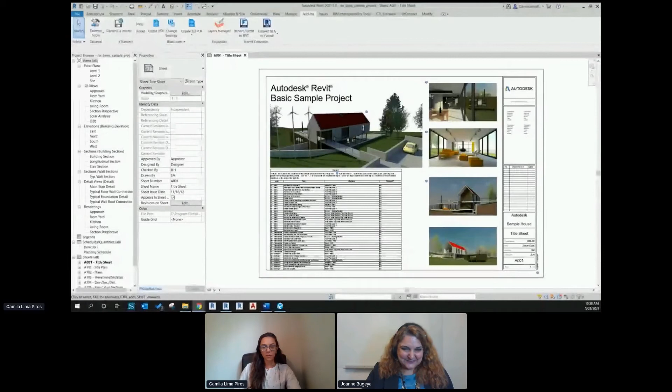So to start today's presentation, I want to touch base with one integration that not a lot of people know about, which is Bluebeam in Revit. That integration is automatically installed when you install Bluebeam. It installs this add-in in Revit, and with that add-in, you can create PDF files, adjust settings, and create 3D PDFs as well.

One of the settings I want to point out, I'm just going to click here under settings. There are a few things here that we can do. We can create the PDF straight from this, and Bluebeam recognizes the sheet size automatically.

The other thing is exporting rooms to area measurement. So if you're going to create a set of drawings that you'll start using area measurements later in Bluebeam, this tool allows you to export the area as an area measurement, which you can then modify later in Bluebeam. It's an interesting feature not a lot of people know about, and it can save time since we're talking about time management here, because otherwise we end up creating those areas in every single set of drawings. Then what else is in here?

There's some security settings, so you can establish that at an early stage instead of assigning it in Bluebeam. There's stuff like requiring a password, and if I check this on, you also have some other permissions you can use.

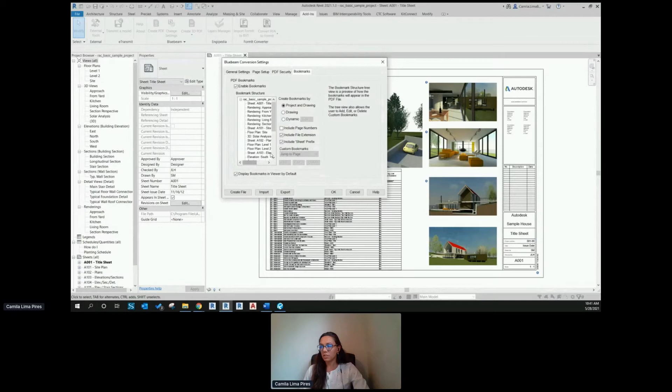The other setting we have here is the label. Right under the general settings, we have the option to use the sheet name as the page label. I've caught myself a couple times doing this, where I have to go set up the page label based on the sheet name and sheet number, just because it's easier for me to navigate through the pages in Bluebeam. So I found this handy as well.

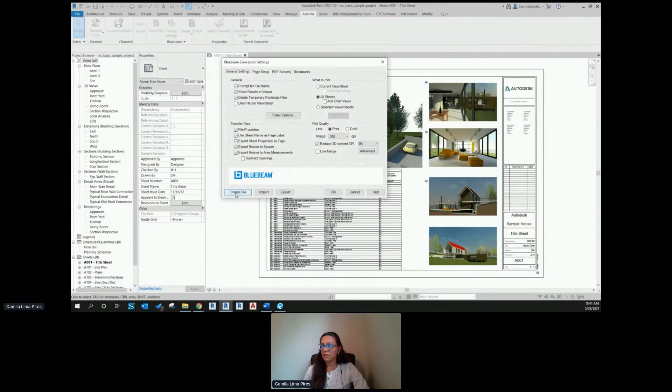Once you're done with all the settings, we can create the file. If I click here, create file - or I could have added the password, so let me go back and check this. I can create the file, and Bluebeam starts creating the PDF file. It's going to request a folder location, so I'm just going to save here.

If you want to take a look at the advanced settings of how the image is compressed and some of the resolutions, you also have access to that information here. I'm just going to click save - this will save on my desktop, process that, and open Bluebeam automatically.

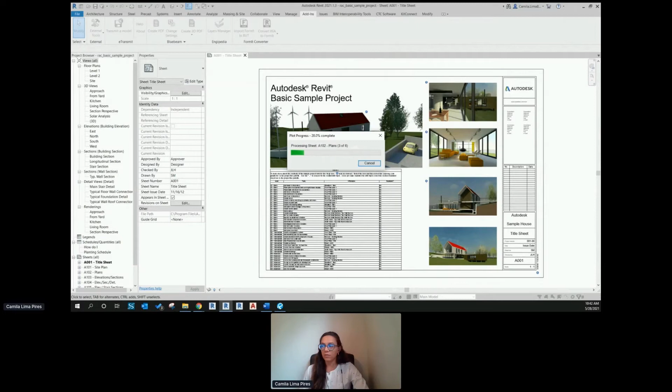The goal of doing this is, one, because I want to use the area measurements for the future. So while Bluebeam is loading, I have this set of drawings here, which is basically what we're going to start discussing - how we're going to create the area measurements, but also make that easier and use the data that we need, and link to other files as well.

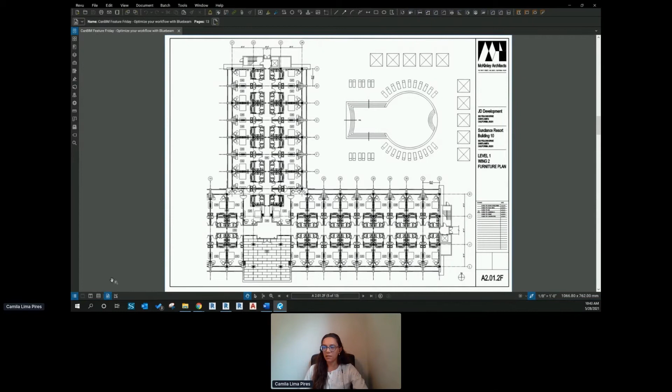So in this set of drawings, one of the things I want to point out is the markup list, which is located here at the bottom of the screen. You can also expand it through here.

With the markup list, this is a place that automatically tracks all the markups placed on a PDF. That includes the author, the date it was placed, any comments associated, and if there's any status, it will track all that information.

So if I place any markup here in this drawing, I'm just going to place one here. It's very simple, it starts tracking that information.

One thing we can do is modify the subject of this markup, because we can use the subject and the label to filter out information.

This is going to be formatted as a table, and each row represents a markup that has been added to the active PDF. Each column shows a particular piece of information about that markup.

In here we can also hide some of this information. So under columns here, we have this list of markups. So if I uncheck author, it will hide from the column here.

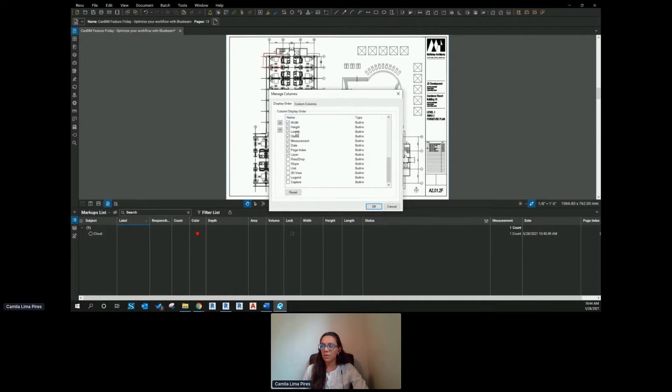If I go to manage columns, I also have other columns here that might not even be showing on that list, so just be aware. Maybe you have a custom column you created, or want to use certain data that's not showing on that list. It might be because it's not in that display order, and you can change the order from here as well. Or there's a simple way, you can just drag and drop to move those columns and expand their sizes.

So I'm just going to hide this responsibility column, just because I want to keep this clean with the information we actually need for the presentation today.

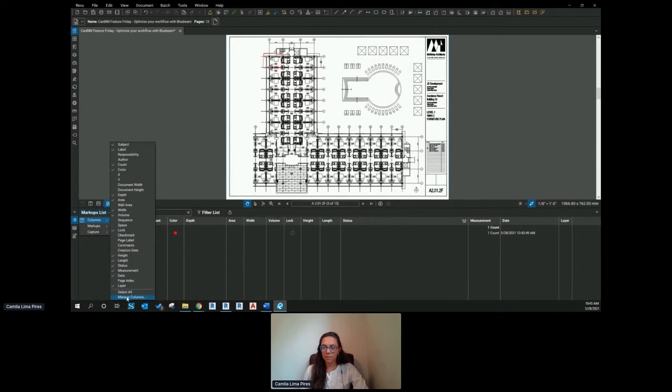Awesome, I briefly mentioned custom columns. So under the markup list, columns, and manage columns, we can create custom columns. There are different types of columns you can create - choice, text, formulas, you can add numbers. Within the choice, you can add a value for each component.

It's something we're going to do today. With that value, you can actually use it for your estimation.

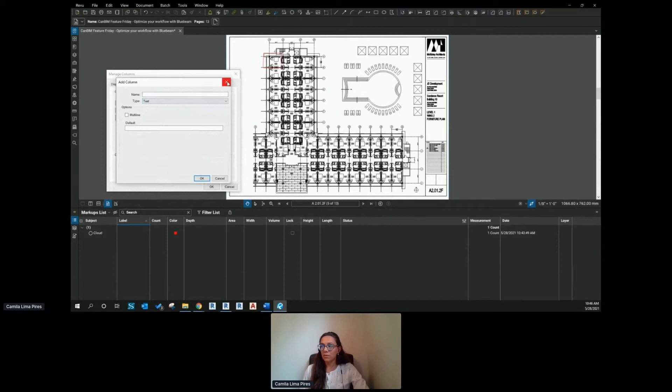So to start with, I am going to start placing a couple of area measurements here. I already set up the scale of this drawing, so I'm just going to click on area. Basically what I'm going to do is create 3 areas here - one for timber floor, one for tile, the other for carpet.

I can simply start placing this as a kind of common thing we end up doing, we just place those. But in here there's not really a lot of information. I can't really use it to filter or add a better value.

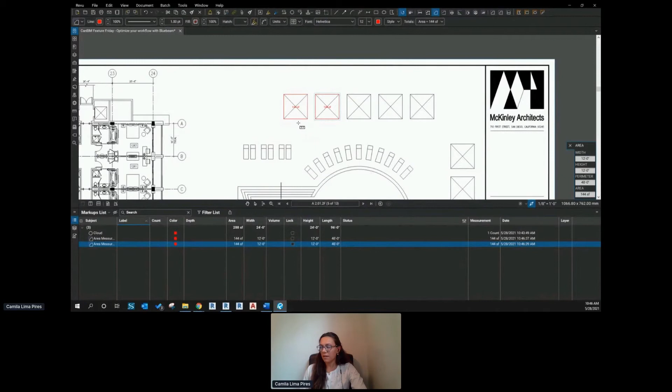So what I'm going to do is select this and edit some of the information. I want this to be a floor area measurement, and this will be timber floor. So in the properties, you want to change the fill pattern.

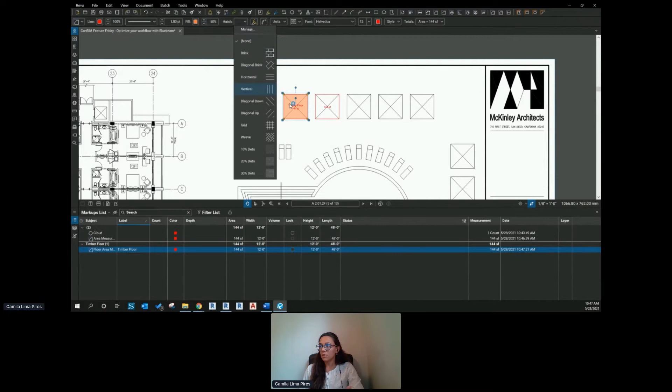Let's say I'm just going to pick this orange and change the opacity, it's kind of nice so you can see the background. You can add a hatch as well, so I'm just going to pick this vertical one here, and then we can start changing the color. That was Bluebeam

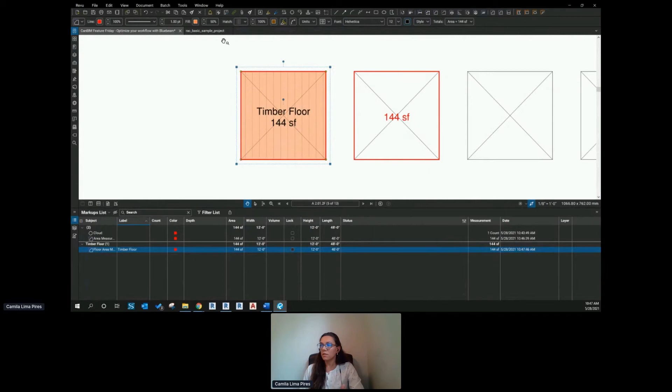trying to open that PDF I was creating. I'm going to change the font as well, and here, the outline. I'm just going to pick something that's kind of in the same location. So we updated here and also updated under the markup list.

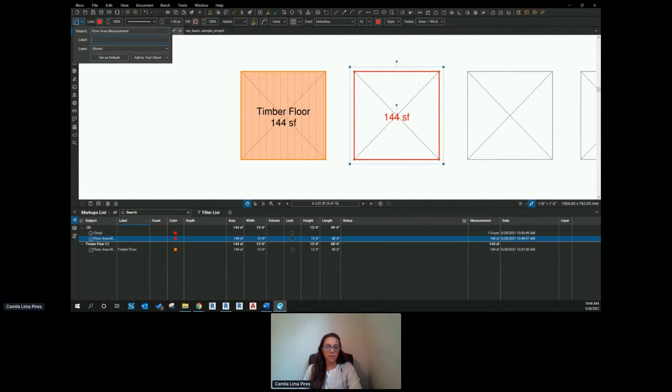I am going to do the same thing for this second floor here. So I say this is going to be part of the floor area measurement, and this will be carpet floor. I'm going to change the outline, add a fill pattern.

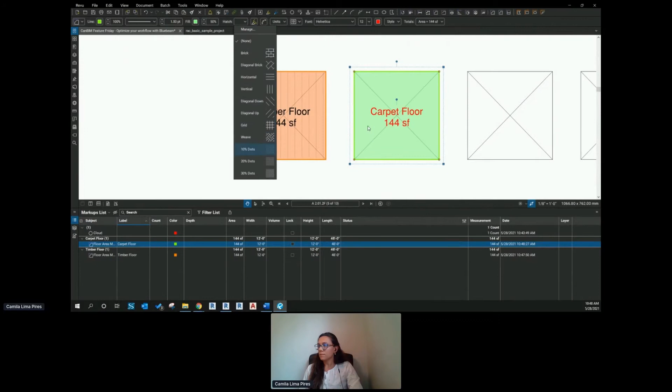And change the hatch as well. The reason I'm using the labels again is because I can filter that information in the markup list. So if I want just to see the type of floor here, that's why I've decided to use the labels and also keep track of it on the screen.

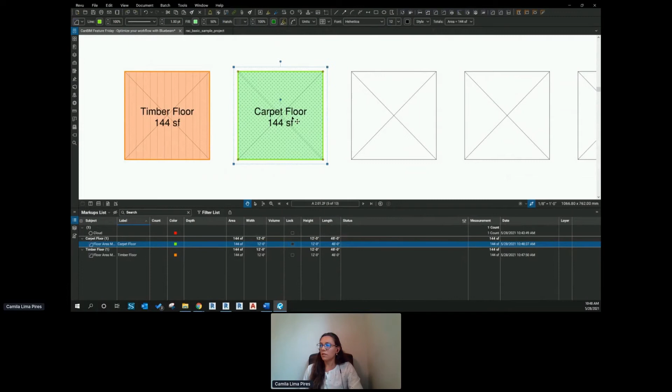So I am going to create one more, and this might be a lot of setup right at the beginning, but once you have that information, I'm going to show you later how you can save this for later use. You can use certain tools to save those markups for later on, so that would be handy because then you don't need to do this over and over, you just need to do it once.

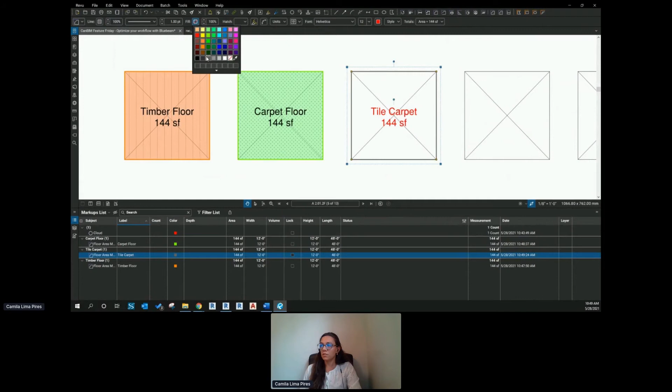I said carpet, I meant tile floor.

And I changed this one here. Opacity. And I'm going to add a, well, let's get this diagonal one here.

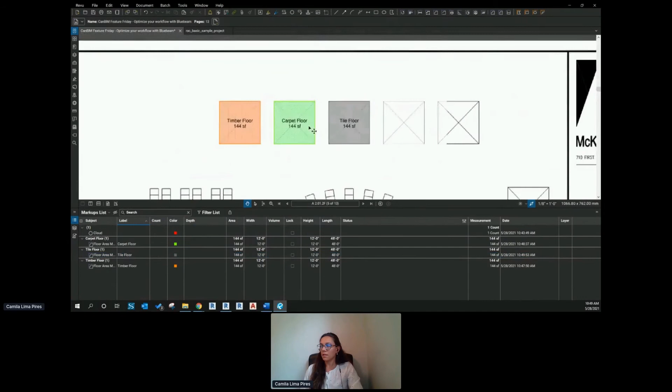Okay, so now I have 3 floors that I want to use as the start of my markup list. After creating these 3 floors, I want to start assigning more information to them, because so far all I have is what I can see here: the length, the width, the height. The length is actually the perimeter of the floor area, and I also have the area here. But so far, I can't really use this information.

So what I'm going to do is create a custom column. I'll go to Manager, Manage Columns, Custom Column, and I want to create one for the floor type.

This will be a choice, because I want to assign values for it. So as a choice, I'm going to add timber as an item, and assign a numeric value - for the presentation, I'll just say timber costs 50. I'm also going to do this for tile, and assign this 40. And I'm going to create another one for carpet, and assign a numeric value of 30 here.

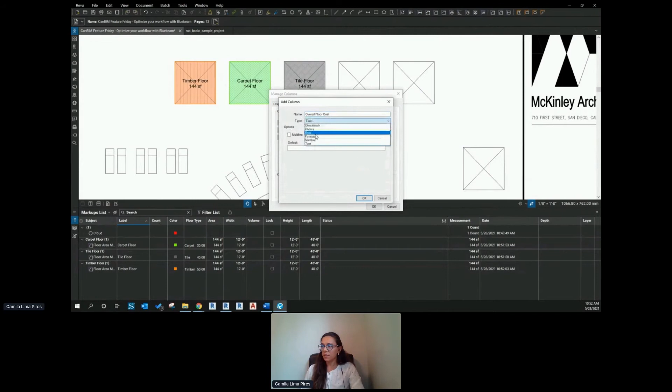With the expression, all you need to do is start typing here, and it's going to show a list of variables. We want to use this information by double clicking, because it's case sensitive - if we don't type it correctly, the expression might not read it correctly. So I'm just going to use the multiply symbol here, and start typing floor type. I see it on my list, double click, and then set the format.

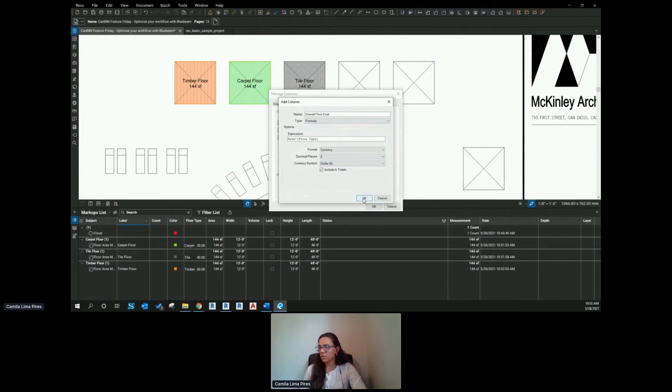This is going to be currency. Notice you can also add percentage, or it can just be a normal number. For currency, you can pick decimal places, dollars, and yeah, I want to include totals. So I'm going to click OK and OK.

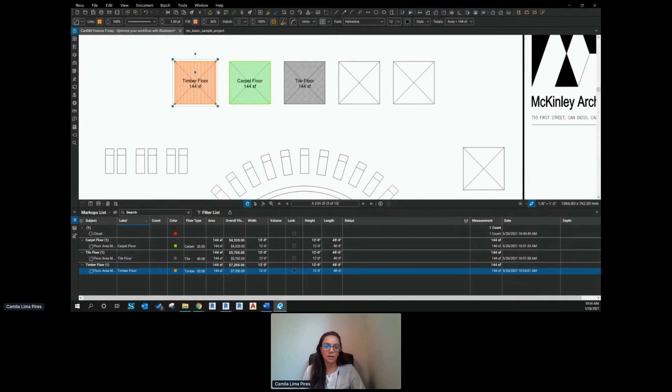It's going to pop right here at the end. I'm just going to bring this close to the area. Notice that it automatically adds the numeric value here - it's calculating the floor area by the cost. And if I start updating, if I move this here, it updates the floor area and also updates the overall cost. So you can do the same thing to calculate, let's say, electrical tray that runs along the building.

You can create a measurement called a poly length. I'll show you that under Tools, Measure, Poly Length. So we can use the poly length and do a similar idea.

Instead of a poly length measurement, I could say this would be an electrical measurement. You can add a label here and call it electrical, because that way you can keep all of them in one spot and then maybe filter and do a summary with that information.

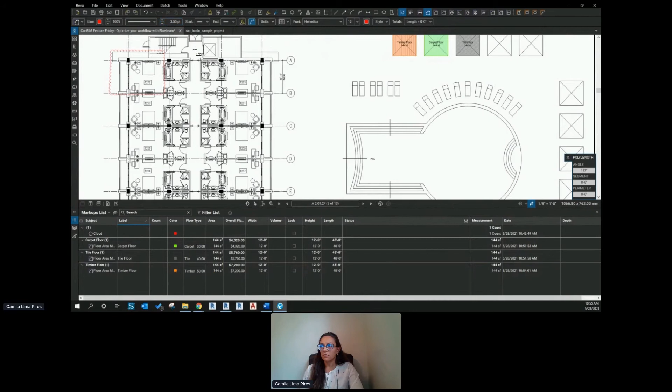This changes some of the functionality, so I'm just going to add a thicker line here. And then you can start placing - let's say the electrical tray runs along here. So once I place... oh, my bad. I double click to place, and now I have that information in here. I'm just going to redo this quickly.

So now I also have this one. And then what we can do is I can create a custom column for one that says that's the run type, edit the electrical tray value, assign as, let's say, 20. And then I add mechanical ducts as well, and use the same polylength to measure the ducts, and add the same assigned value for it using the custom column.

Then what we ended up seeing is we can create an overall cost for the MEP cost that runs the length multiplied by the run type. And then you're going to have that information in the totals. So this is also something we can do with the markup list.

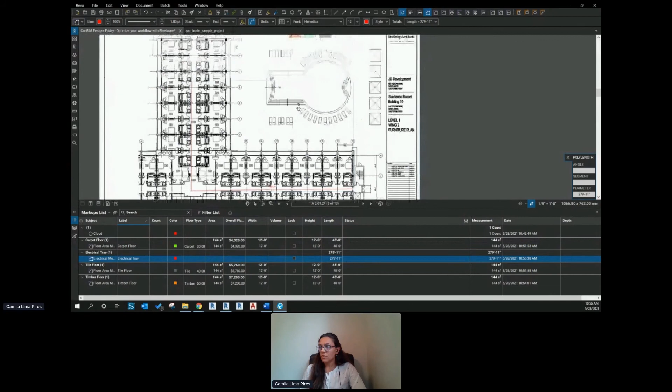The other way that we can assign, you can use this floor area cost, would be another tool that I want to show. It would be the dynamic fill. So using the dynamic fill, you can use it to fill up some of the areas that have this odd shape. So the dynamic fill will be over here, and first you need to assign which of the floors you want to use.

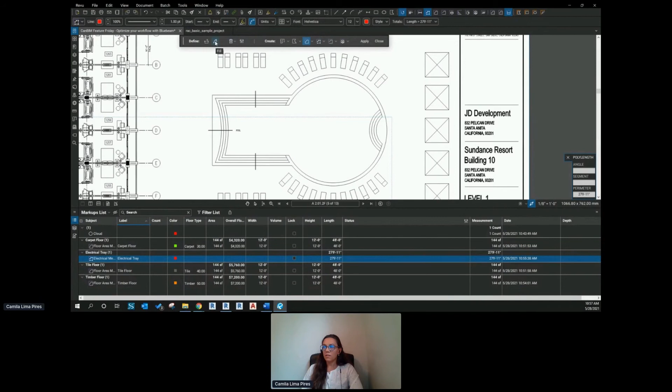So I'm just gonna say that's the timber floor, and then you can use this little bucket in here and then start painting the area. So it might go over a couple of areas. Once you're done, you click apply, and then you fill up the area.

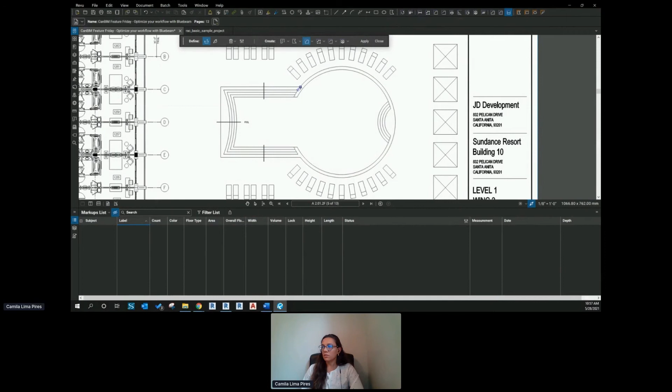So I see there's some areas in here that kind of went over, and if I don't want that, I can edit. I can add a line so it blocks that area and it doesn't fill up this information here. So I can use the dynamic fill as well.

And because I already used one of the tools that I created, it ended up going here at the bottom of the markup list. And you can see that it calculates the area. So that's kind of nice and organized. I'm going to hit close here.

So I did mention the filter. So if I use the filter here and I click filter list, I can select which ones I want to see on my list and organize it a little bit better for summary purposes. You can just show that information. And you're going to end up with a lot more markups than I have in here. So this can be a really good way to filter your information. I'm just going to leave that in there.

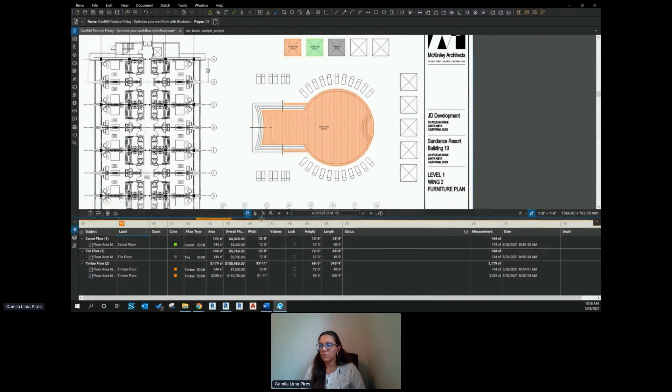So the other thing that I want to show is the tool chest. So in the tool chest, we have saved those markups for later use, and we can save this information. If you look here under the tool chest, under the recent tools, I have those ones in here. But I don't know if you ever noticed, if I close Bluebeam, everything that I created under the recent tools is going to disappear. And then all your work is gone.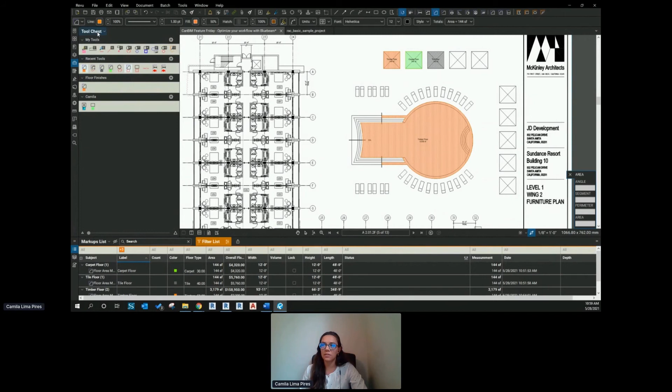So what we want to do is we want to save this. So I can either select here and then change to the floor finishes. What I did is I actually created one for floor finishes. I even have one little one here for myself. But that's what you can do under the tool chest. You can create your own here.

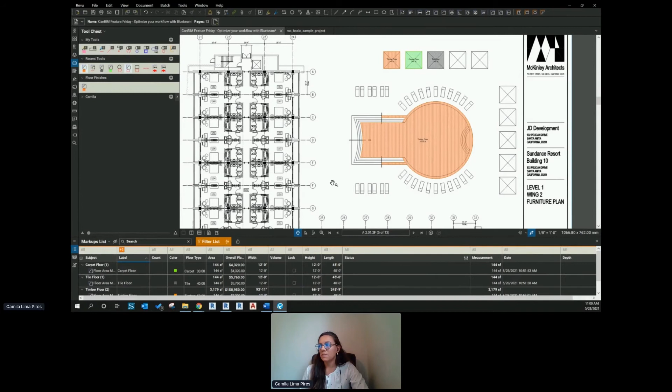Or if you have a company standard one, which is kind of nice, you can actually use import company standards and export. So let's say one person is responsible to create some of those tool sets, and they just send them out to everyone in the company. Now everyone has the same type of set, so we're organized. So one way is I can drag and drop. I can also right click in here, add it to tool chest, and then select the one that I want.

Notice how it kind of changes here. There's two different modes. One, if I click here, it just places exactly the same shape and format that I used. If I double click, it changes the properties. And now I can actually use the properties, but with a different shape. So if I had another shape here, I can place the area, and it saves the properties, but doesn't have the same format.

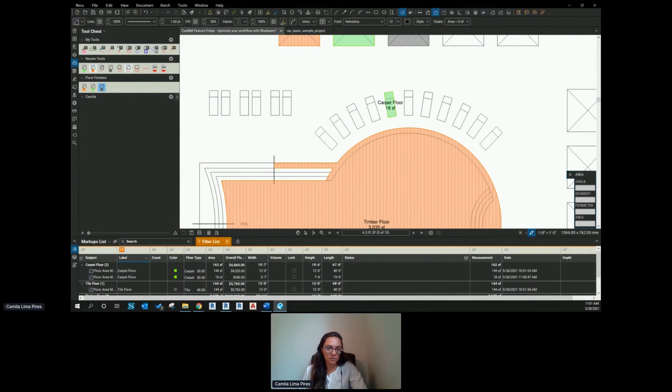So let me save this one here as well. So I'm going to right click here, add to tool chest for floor finishes, and I would save it for later on. So that's pretty handy.

Now to the summary part. So after I created my floor types and already started assigning them on my drawing, I can create a summary. There are different types of summaries that we can create in Bluebeam. There is the PDF, there is the CSV. They are sort of similar, but the data that comes out is in a different format.

So with the PDF, you can actually create one that contains the thumbnails, and you can add hyperlinks to that. And with the hyperlink, you can even attach that summary to the PDF set.

So let's say it goes right to the bottom. And then with that summary, you can actually click because it has the hyperlink, and it brings you back to where the markup is located. With the CSV, which is the one that I want to focus on today, it's going to create a CSV file that can be read in other third-party programs like Excel. And you can also create what's called the quantity link, and that's our goal here at the end.

So I am just going to create a CSV summary. And with the CSV summary, here under columns, you can pick the columns that you want to show as well. So you can select just the information that matters. You can filter some of this information. And you notice that because I applied the filter here under the markup list, it already caught that information, and it's already applying here. So this is good because that's all I want.

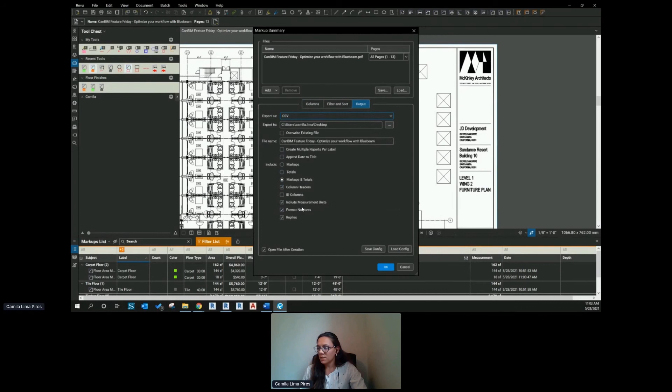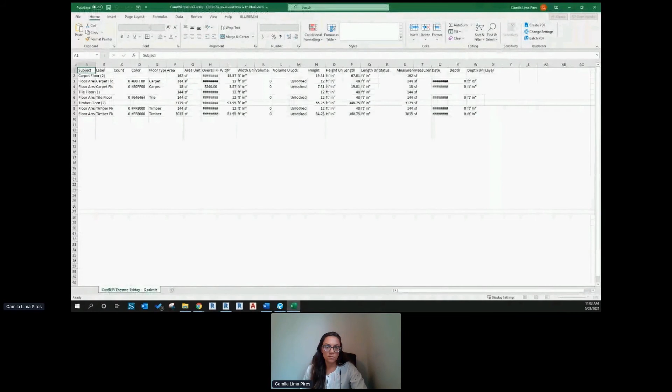Under the output, we have here the location where it's going to go. That's fine for now. The file name. You can create multiple reports per label. I can append date. I'm just going to leave the markups and totals, and the include column headers for this. I'm going to click OK. And it automatically opens that in here. So I'm going to expand some of this information so we can read everything. So here you see there is the floor type, the area.

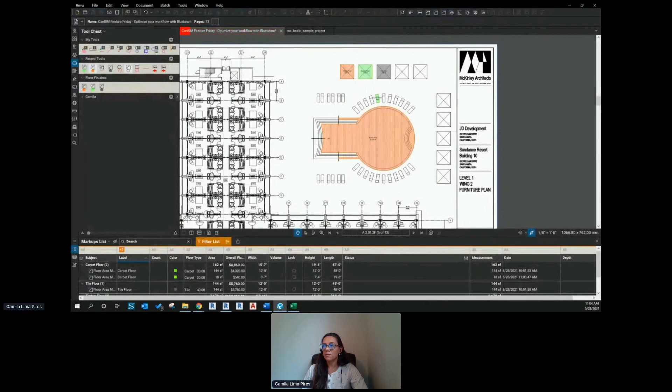So what I want to do is edit what's called the quantity link. With the quantity link, it's going to actually create a link between the PDF set and the Excel spreadsheet. So first, I needed to save this Excel spreadsheet. In Excel, I am going to use the area under the floor type. So here, I can quantity link and then create. I'm going to add, and that's why it was important to save the file, because now I need to browse to the location of that PDF. Just going to load it here. I'm going to click OK.

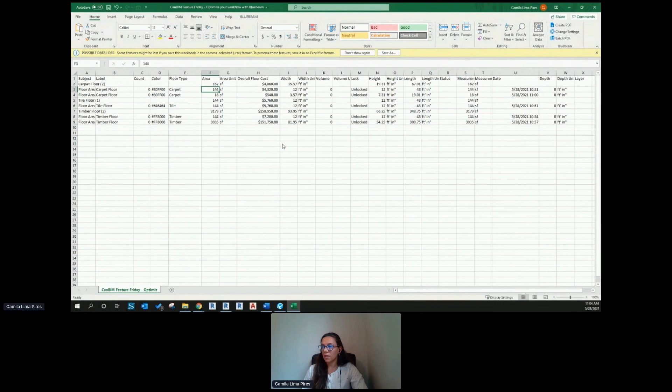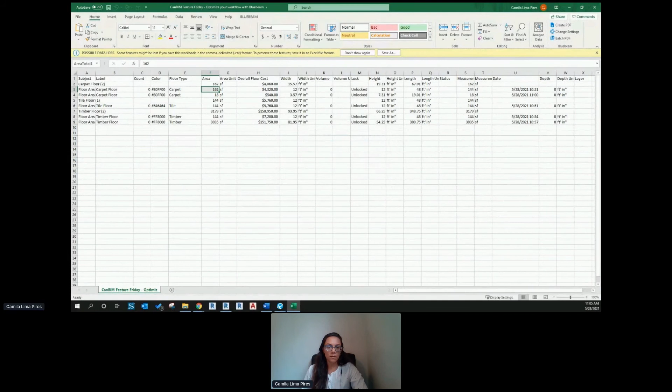So here, what I want to do is actually assign what data this is going to pull from. So I want the area of the subject floor area measurement. And I can even keep going here and say this is the label for the carpet floor. You can even give it a cell name. I'm just going to leave it there for now. And I click OK. So now if I go back to my PDF, I just want to put this here on the side and hide this guy here.

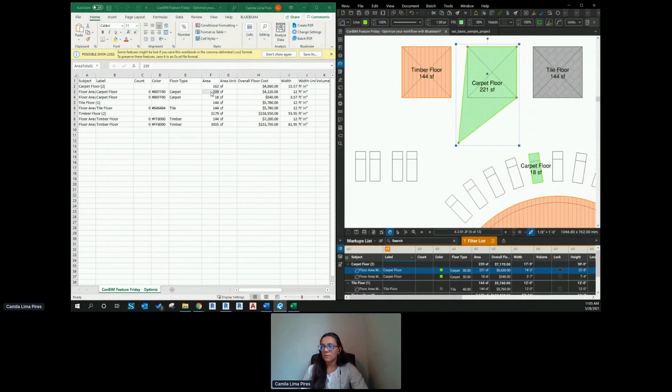So if I go here and update the carpet, let's say I'm going to update the area. You notice that it updated on my Excel spreadsheet as well. And so that is the important part. So now I don't really need to worry about doing this again and again. So if I keep adding more carpet area, let's say I go back here and add another area, that information is updated here, but also updated in my Excel spreadsheet. Okay. So that's all I had to show you.

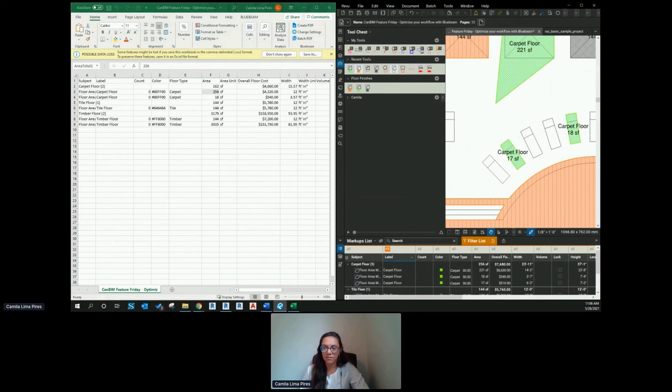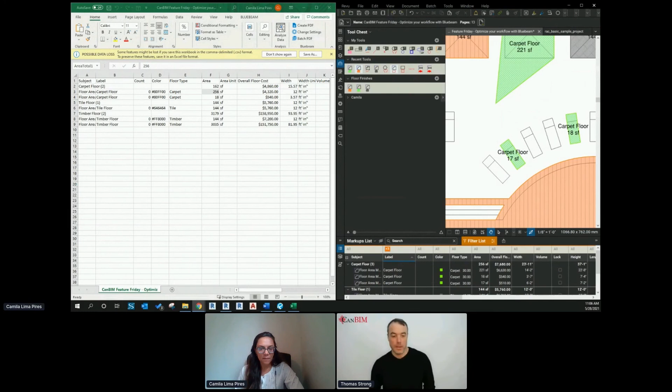Okay, great work. Thank you so much for that. Really appreciated the insights into the product like that. And these types of videos are great online because anyone who's looking to get familiar with the product or trying to improve, they're going to be searching around for the answers to these types of questions.

So I don't know if Sergey's listening. Sergey, you've got to publish the questions in the Q&A panel there, because I don't have access to do that, I think. But I just had some other questions. I don't know if Joanne's going to come back on.

But from your experience with SolidCAD, obviously selling a lot of Bluebeam across Canada, who are the main customers of the product? Is it a split between people in the field working in construction doing coordination work, or estimators, or who are the main users? I would say everyone. From the architecture point of view, we have architecture consultants using it, we have architecture offices as well. They use a lot of Bluebeam.

I think the big thing is we don't see them using Bluebeam to its full potential. So there's a lot in Bluebeam that we can do. Like the quantity link, it's not that hard to set up. It's something that can improve your workflow for sure, and save time as well. Imagine if I had to redo that summary report every time I modify something in my set of drawings. So we can definitely improve a lot of things using Bluebeam. So I think it's very wide.